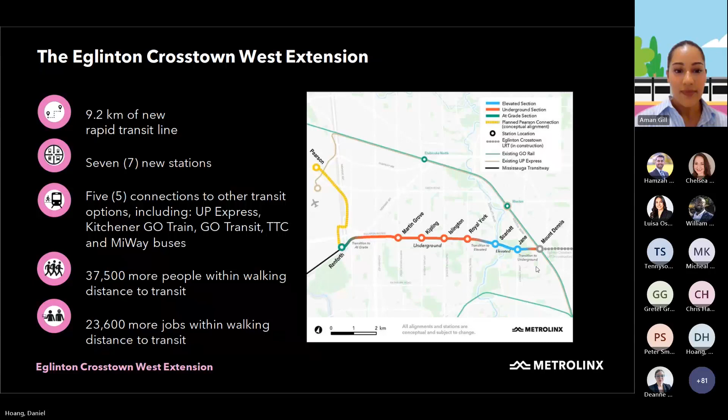I'll hand it over here to Micheal, who will take us through the construction timeline.

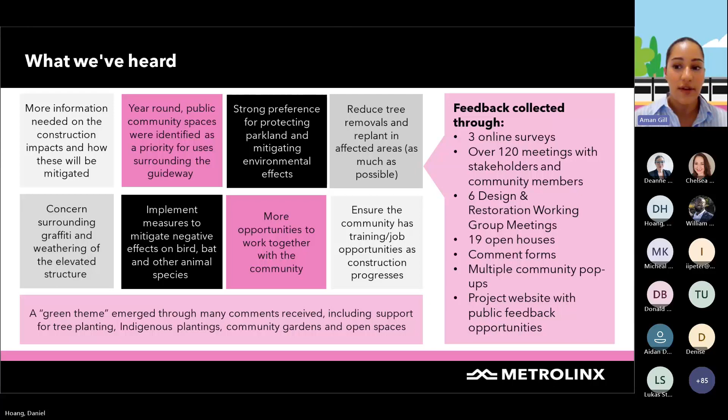Metrolinx is committed to minimizing project impacts through design, construction, and operation by integrating ways to reduce or mitigate the impact on the environment through design, ensuring Metrolinx contractors adhere to specific requirements and expectations to mitigate construction impact during the construction phase, and ensuring that regular maintenance and monitoring takes place during operation.

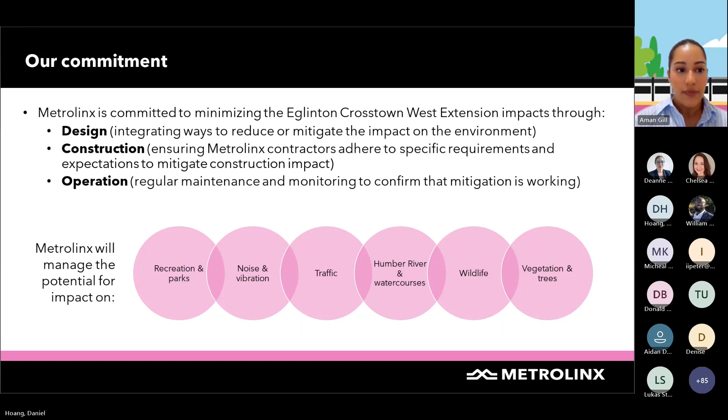We'd also like to share some best practices, including effective hoarding and signage placement to facilitate detours, thoughtful site plans to ensure business continuity, responding to neighborhood concerns to resolve reasonable complaints in a timely manner, traffic analysis and modeling to assess impacts and mitigations for all projects in the area, identifying and communicating public or private parking impacts well in advance, and surveying businesses so programs can be tailored to meet their needs.

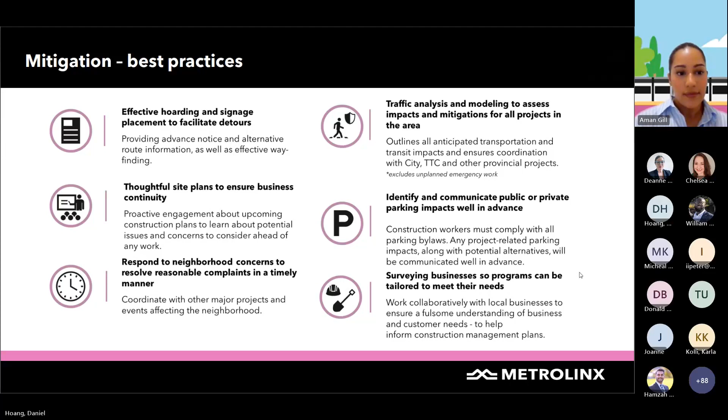Community safety is our priority. Some of the ways we achieve this is through our overall requirements, but also site-specific requirements. I'll read through some of them. Our overall requirements include contractors adhering to all provincial safety legislation and city bylaws, detailed construction and traffic management plans, along with safety plans that have been shared with Metrolinx and the city for review and sign-off.

The contractor will have to develop and implement noise and vibration plans in compliance with provincial standards. We've got flag persons and paid duty officers directing traffic where needed, and all construction impacts are shared with the community in advance via construction liaison committee meetings, community notices, neighborhood canvassing, etc.

Site-specific requirements include safe pedestrian access to be maintained, with any temporary sidewalk closures or detours having safety barriers, clear detour signage, and wayfinding so you can still get to where you need to go safely. During advanced utility work phases, fencing will be installed to ensure safety around the work zone. During the station construction phase, construction hoarding will be installed.

It will be visually appealing and well lit. The designs and imagery will be tailored to reflect the local community, and it will include wayfinding and safety information, again, so you can get to where you need to go safely, and access for emergency services will be maintained.

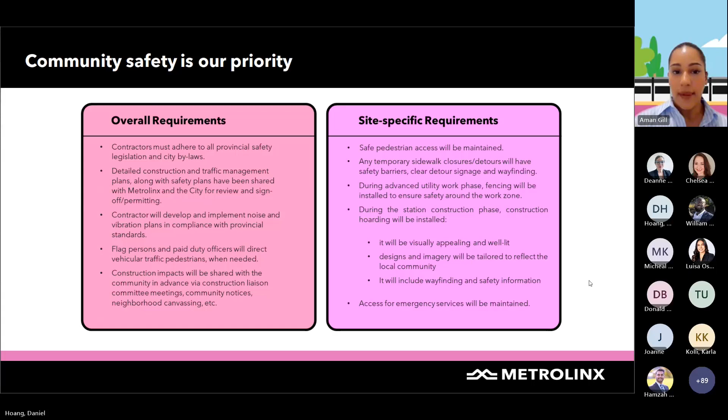This slide talks about the impact on parks, and just to emphasize that we know parks are quite important. All of these parks will be able to be accessed at all times during construction. That is a contractual requirement, so it's important to note that.

Some examples of this are the Fergy Brown Park Access Road. It is a contract requirement that a new Fergy Brown Park is constructed before the old Fergy Brown Park Access Road is decommissioned. Another example is the commitment to constructing a cycle track along the south side of Eglinton between Jane and Black Creek. So just to emphasize the importance of these parks and that access will be maintained at all times. Next slide, please.

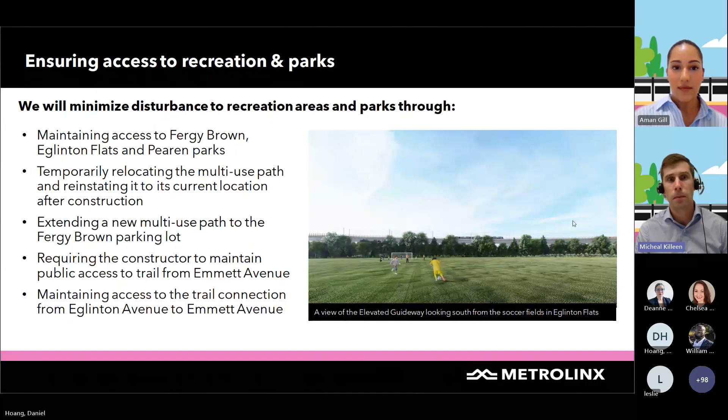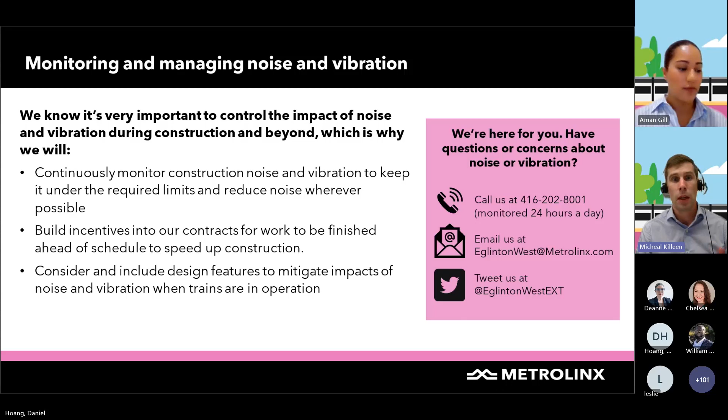And the other aspect to consider is the noise and vibration associated with construction. It's very important that when the contractors are working on this, excessive noise and vibration is not generated. To prevent this, we have set contractual limits, and Metrolinx have also set up a helpline for anybody that wants to raise concerns. In addition, we've also carried out an acoustic study and hope to share the results with you so you can hear for yourself and judge what it will sound like in operation. The results will be able to inform additional mitigation such as rail dampeners or noise walls in future.

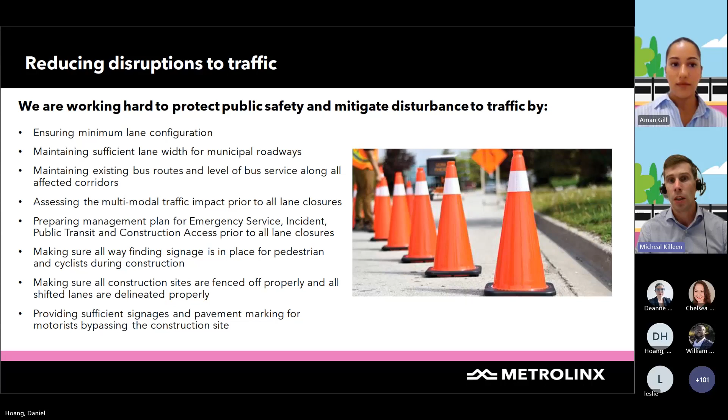This slide talks about minimizing disruption to traffic and to users. This is a very important consideration for Metrolinx in terms of their projects. By and large, works along the ECWE will be off Eglinton Avenue, trying to minimize disruption to users. In the event that works do have to come onto Eglinton Avenue, for example if you're doing utility works or an approach ramp near Scarlett Road, you may have to work in the roadway. In this case, the contractor will be required to submit a traffic control plan to the city for review and approval. This plan will contain information such as how many lanes will be taken up, how long the works would be, and safe access points. Safety is at the forefront here, and all of these plans are developed in close collaboration with the City of Toronto.

I'm going to go through how we're going to mitigate impacts to natural features. First, I'm going to speak to the Humber River. There are a number of measures that will be implemented to protect the Humber River and other surface water drainage features and wetlands.

The first thing is really at the design stage. We're not going to be in the river channel itself. The bridge is going to span the river, so there's not going to be any direct impacts in channel. We install construction fencing around the perimeter of the construction site to prevent the encroachment of construction vehicles and workers into the adjacent natural features. As a design criteria, we retain and protect as much of the natural vegetation as possible.

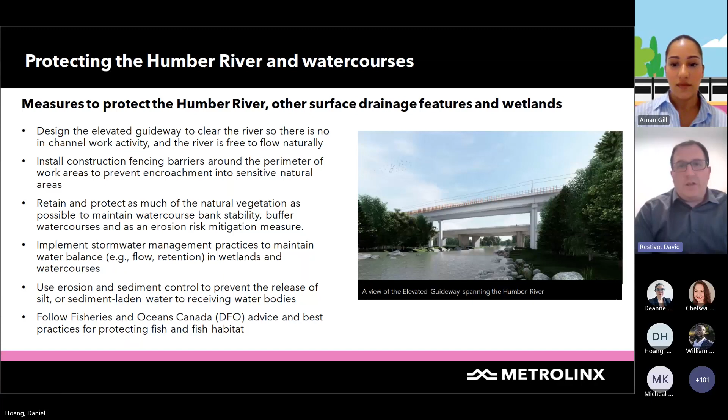This has many functions—it provides stability, reduces the risk of erosion, and acts as a buffer to these water features. We'll implement stormwater management practices to maintain post-construction flow and water retention to surface water features and wetlands, matching what is happening prior to construction. Erosion and sediment control plans will also be implemented, preventing the release of sedimentation to receiving water bodies. We consulted with the Department of Fisheries and Oceans, or DFO, and they provided a letter of advice, which includes a number of things to protect and avoid effects to fish and fish habitat, including best management practices, conducting work in the dry, monitoring programs for sedimentation, and the need to prepare a spill response plan.

Protecting wildlife is also a priority. This includes implementing timing restrictions if you're going to be disturbing natural features or wildlife habitat, such as a bird nesting window and vegetation removal restrictions. For example, between April 1st and August 31st, there won't be any tree removal within that habitat. We also install things like bat habitat structures, in accordance with an Endangered Species Act permit, to supplement habitat that might be removed in the woodland feature, acting as a mitigation measure.

We fence the work area, as I said before, and that's not only to prevent encroachment out, but also to prevent wildlife from coming into the construction zone. In the event that does happen, we have qualified biologists or personnel with the qualification to handle wildlife and move them out. First and foremost, we allow wildlife to egress the construction site on their own, but if they're injured or not leaving the site, these individuals are qualified to handle them and move them to an appropriate habitat.

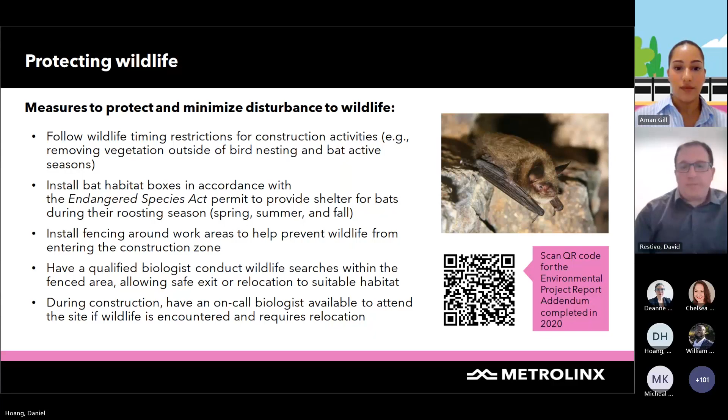So, ways in which we manage vegetation and tree impacts: first and foremost, we follow the Metrolinx vegetation guide, which identifies the data needed for arborist reports. It identifies the number of tree and vegetation plantings needed to offset any removals in natural features or landscape areas affected by construction. It also recommends healthy soil specs, seed mixes, and plant selection.

Other things we do include consulting with municipalities and local conservation authorities and abiding by environmental regulations and bylaws. We provide additional compensation for designated natural features—it's not a one-to-one, we're providing a greater number of vegetation and trees to go back onto the landscape. And we also ensure we site our work outside of sensitive wetland features.

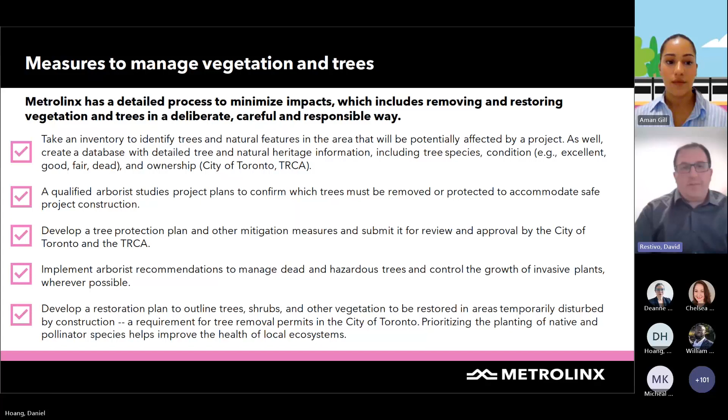Next slide. So we do have compensation formulas that we use. For example, in designated natural areas, we use the TRCA's protocol, and for every 1 hectare of woodland that we would be removing, we would have to replace potentially 3 hectares of replacement vegetation.

And similarly, the City of Toronto has tree bylaws. So if in areas regulated by the city, for example a private area, we would replace all private trees removed over 30 centimeters diameter at a 3-to-1 ratio, all park trees and all street trees at a 3-to-1 ratio, and ravine and natural feature protection areas would be another area-based compensation approach.

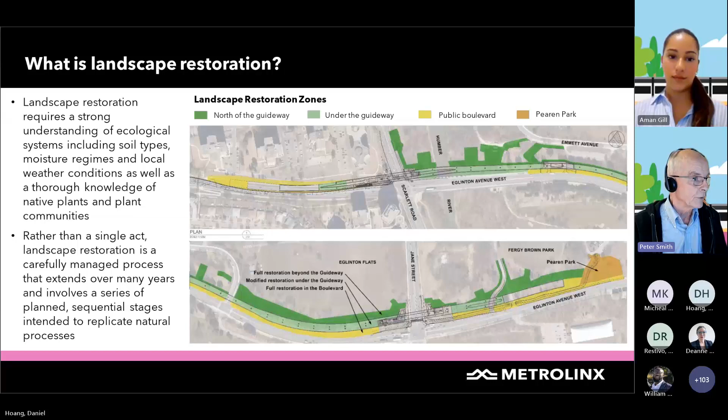Next slide. So what are the 4 major components of successful landscape restoration? Number one, very important, is healthy soil.

Metrolinx is developing criteria and strategies for either repairing existing soil on site or importing new soil, and developing very high standards for all of these activities. In all likelihood, the soil that will be brought in or prepared on site will be far better than what's out there now.

We all know that Eglinton Avenue West was actually constructed in 1970 on a landfill causeway with a lot of fill and probably at the time not very good topsoil. So the soil, when we leave the site, will be even better than what's there now.

We use native plants. Why do we use native plants? Because they are hardy, they are self-sustaining, and they attract or set the context for wildlife habitat, which is superior to other kinds of vegetation.

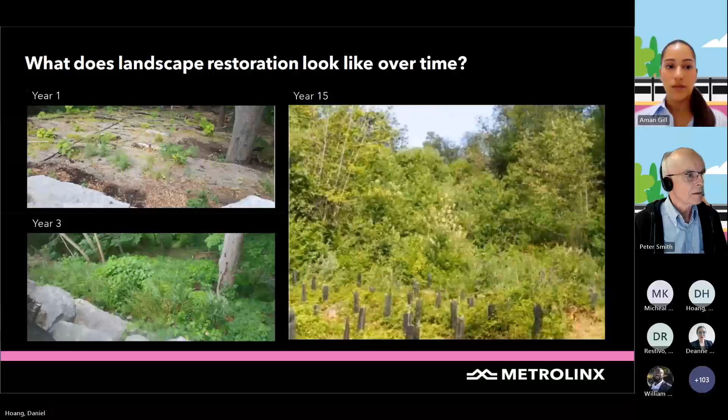Metrolinx is undertaking a landscape restoration plan that's underway right now, scheduled to be complete sometime next June. What is the plan and the purpose? It's to set the direction for detailed landscape design along the alignment, covering all aspects of the ECWE, including Eglinton Flats, the areas associated with the elevated guideway, the city boulevards, and all the lands surrounding the ancillary buildings and stations. So it's a very big project.

One of the purposes is to ensure a consistent line-wide approach so that there is an identity to the ECWE project. Certainly, one purpose is to engage directly with the community, with community stakeholders, and to engage with city and TRCA stakeholders in order that we understand their requirements and they understand our issues and challenges.

When the restoration plan is complete, it will have been approved and vetted by the key stakeholders. That provides a certain design certainty so that we know what's going to come out of this process, and the community knows what's going to come out of this process as well. We'll all understand the process and have expectations that are realistic and implementable.

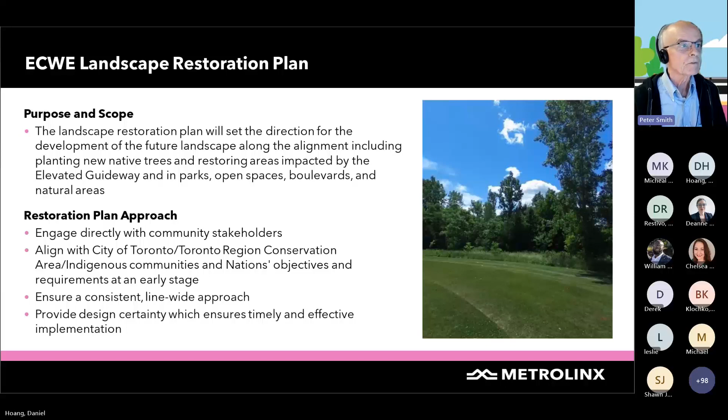That's just a couple of views of the elevated guideway and the kinds of restoration that would be associated with it. North of the guideway, any lands impacted by construction will be restored and will become even better than what's out there now, eventually.

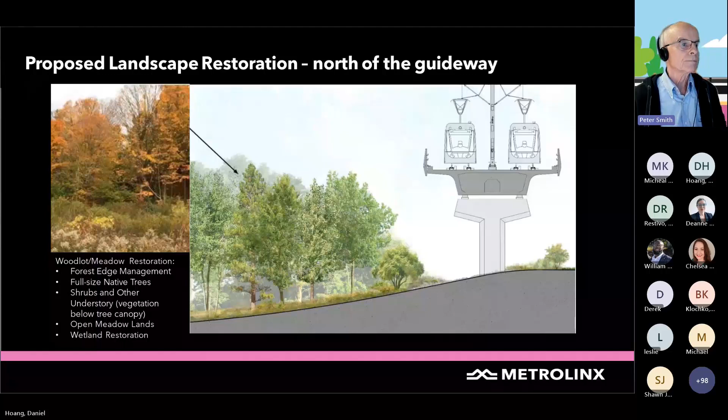The lands directly underneath the elevated guideway are challenging, without doubt. There is reduced sunlight and reduced rainfall in these landscapes, which means they're going to be quite unique as well as challenging. There are plants that will survive under these conditions, and we will optimize their use.

There may also be areas where vegetation cannot be supported, and those areas will be developed with beach stone laid out in what we call a dry creek pattern, fully integrated with the vegetation on either side. This is still under development—we're still working with this—but the intention is to develop landscapes that are cohesive, integrated, and fully recognizable as designed landscapes.

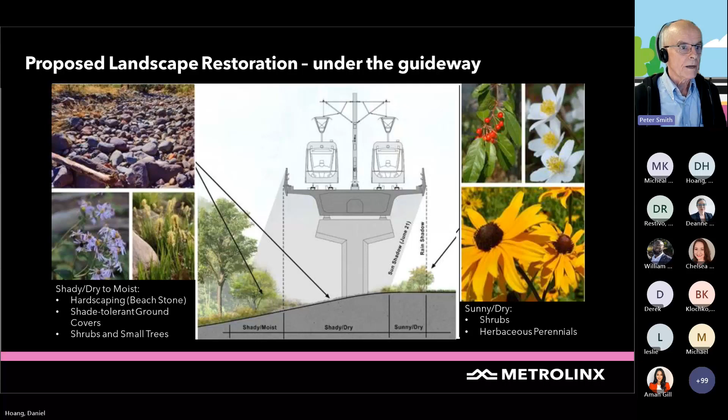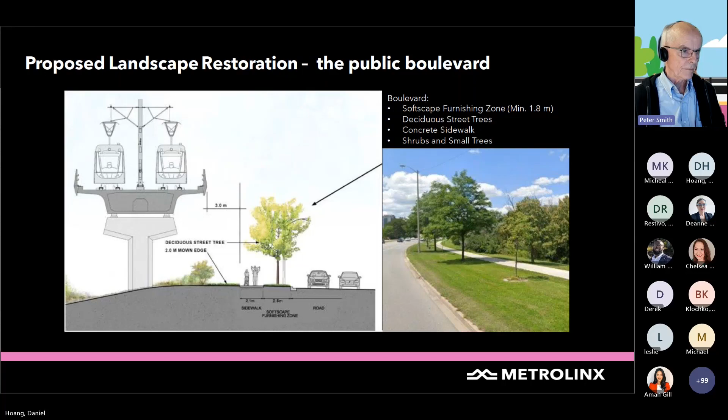Not only to help create a pedestrian environment which is comfortable and at a pedestrian scale, but also to mitigate views of the elevated guideway from the street.

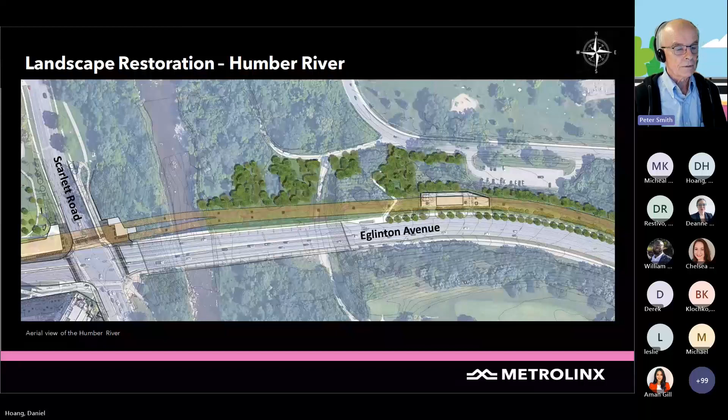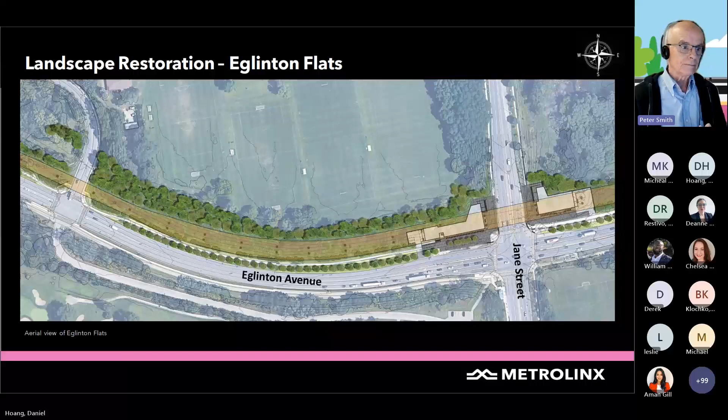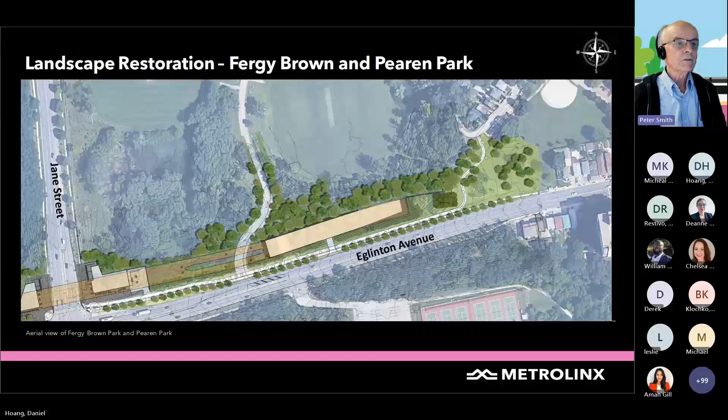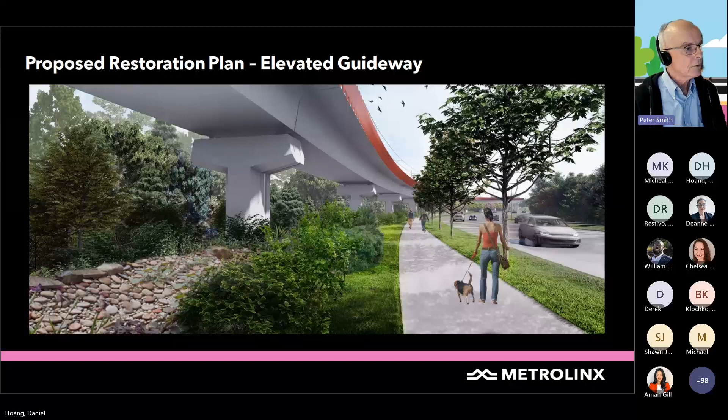So we're optimistic. We're looking forward to continuing to develop the restoration plan and looking forward to sharing it with the community at some point in the very near future. Thank you, and I believe it's back to Micheál.

Thank you very much, Peter. So following on from the work that Peter and our team are doing on the restoration plan, we're also developing some tools to help you visualize and hear what the guideway sounds like. Although we don't have the acoustic part of this ready for today, that'll be a future open house, we did want to share some of these tools with you. Next slide, please.

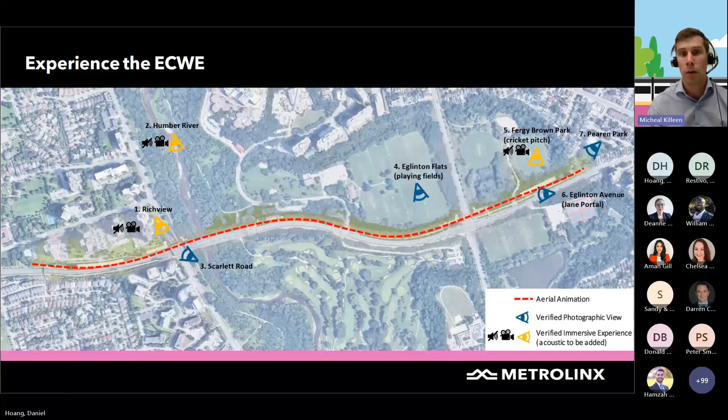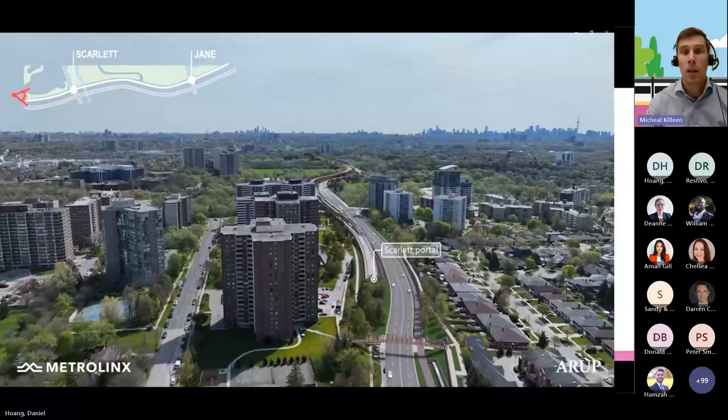Thank you, Daniel. So this is the aerial animation. We're starting here on Scarlett Road and we're going to travel from west all the way to east. See here, this is Scarlett Portal, where the underground tunnels enter, first contact daylight, and the alignment starts to rise from the ground. It takes over a bit of Eglinton, and you see Eglinton is diverted here.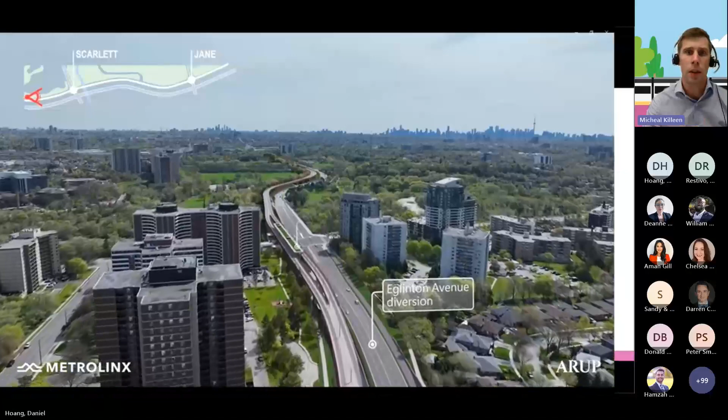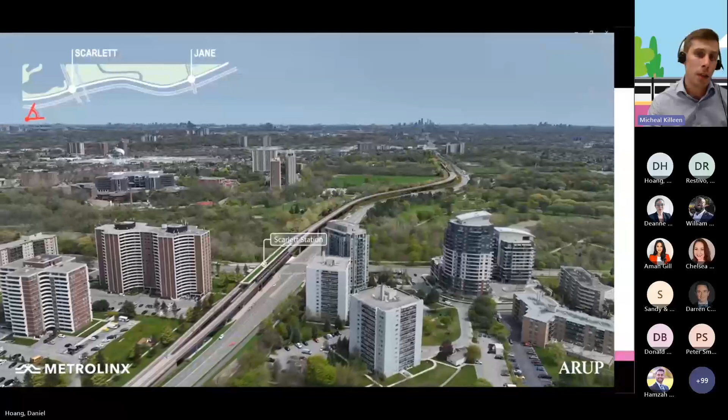What we see now in the picture is Scarlett Station, and if you look closely, you'll see a green roof. This helps reduce environmental pollutants, and it also helps us to lower energy costs. This is another view just at Scarlett Station. We can see that green roof there again.

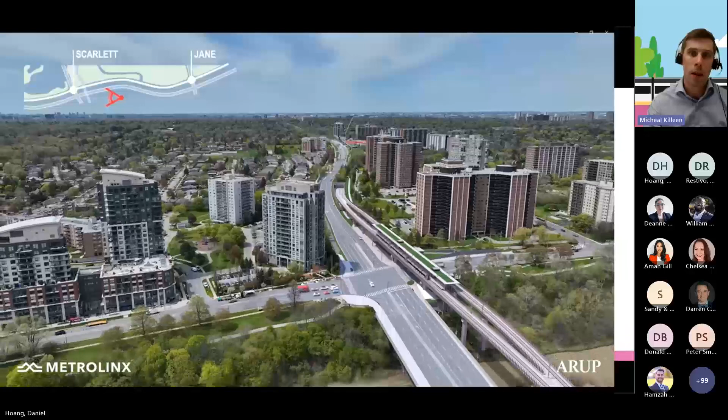Looking back, this view will now show us what the Humber River looks like. In order to minimize the impact on the river and aquatic life, there's a minimum of a 7.3 meter setback for the piers, so no piers in the river.

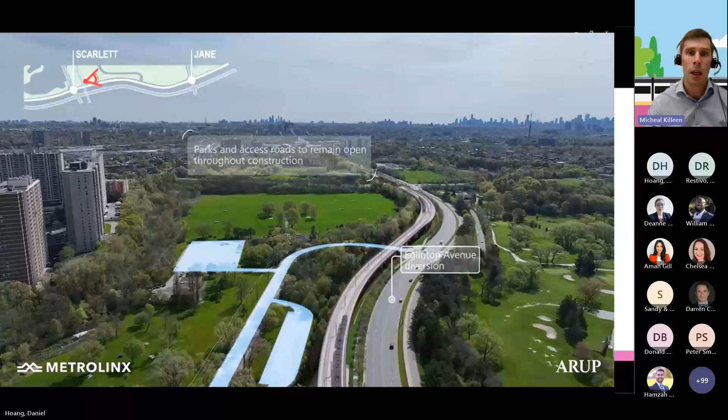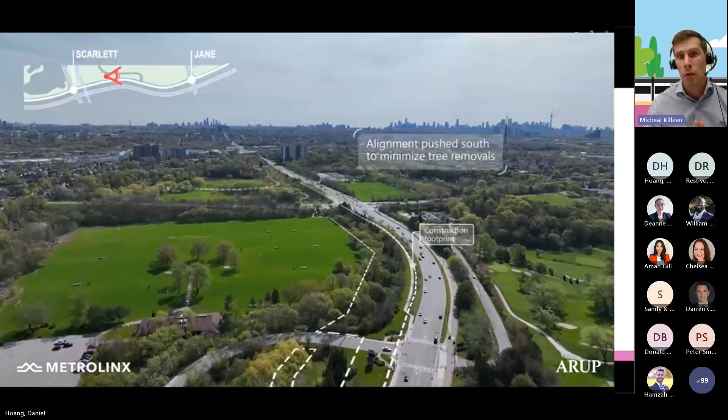This image here shows us the playing pitches, and these are the parking lots. We know this is a very important amenity, and access is maintained at all times. The dashed line here is basically showing the extent of construction. We've pushed it as far south as possible in order to minimize the tree removals, and also introduce incentives into the contract so that the contractors, when they're working, will be incentivized and compensated for saving more trees.

As you move here now along Jane Street, very shortly you'll see where our cycle track starts.

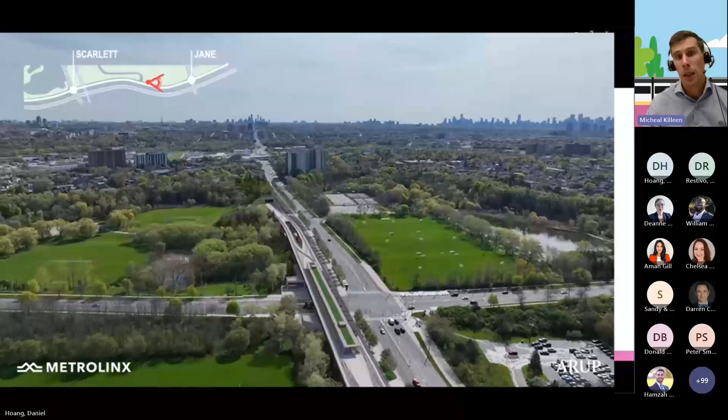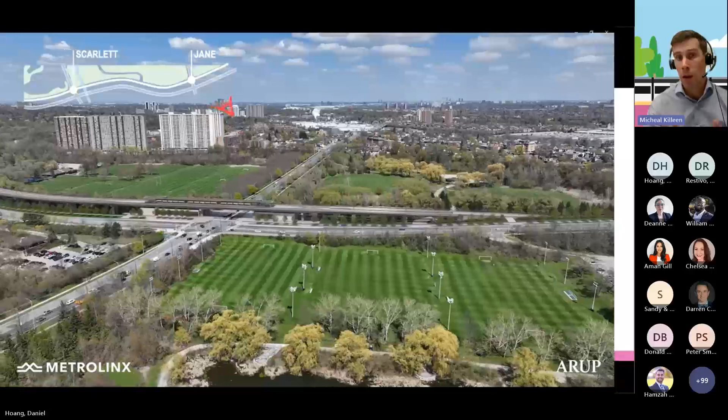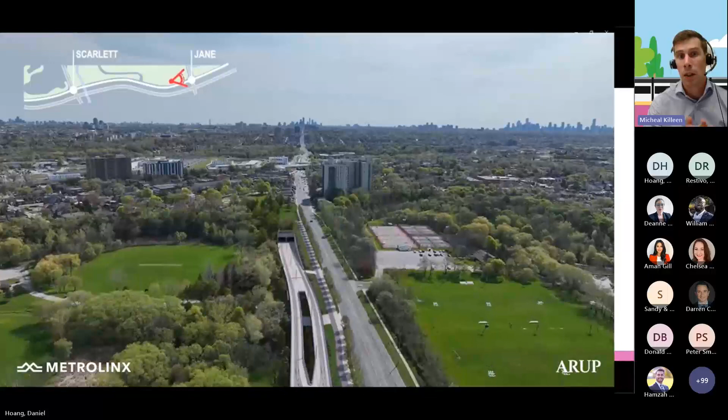The cycle track basically starts at Jane Street and goes all the way to Black Creek Drive. The purpose is that the MUP, which goes to Pearen Park at the moment, will be disconnected during construction, so we have to put an alternative cycling route in place. We believe this offers better connectivity for cyclists. You'll also note highlighted here this new upgraded Fergy Brown Park access road.

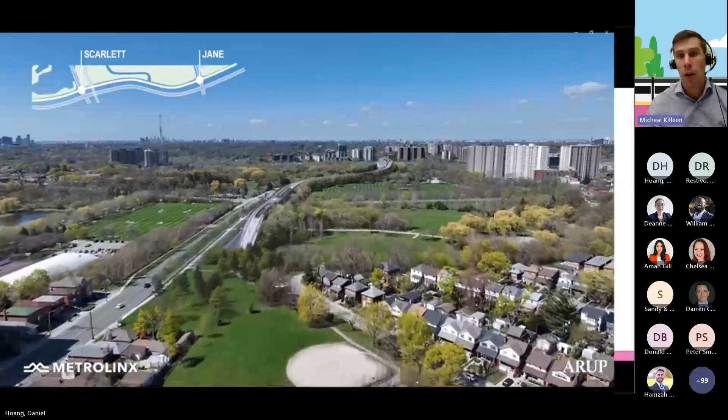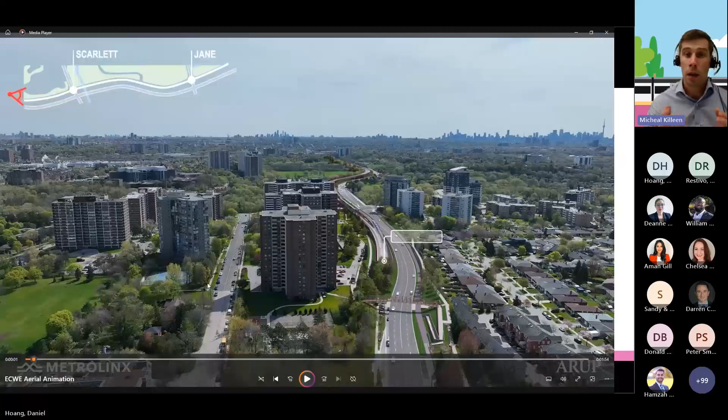As mentioned earlier, this is to be constructed first before the existing road can be decommissioned. Finally, we have a view looking back here on Pearen Park and looking west. So that's our aerial animation just to show some key features of this project. Thanks, Daniel. The next thing we're going to speak about is these time montage photographs, basically the restoration over time.

So how do we predict what the trees and vegetation will look like? We've consulted with our arborists and landscape architects, and we've looked at what tree species grow and the rate of that growth. This allowed us to predict what the trees are like after 5 years and also after 30 years. We then take this information and update our baseline information that we see in the field. Let's look at some examples.

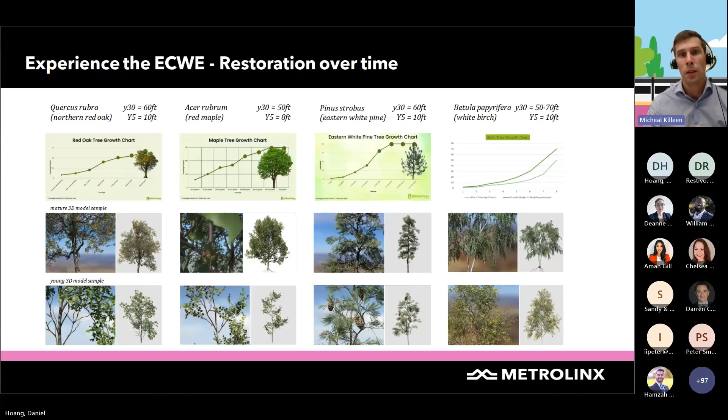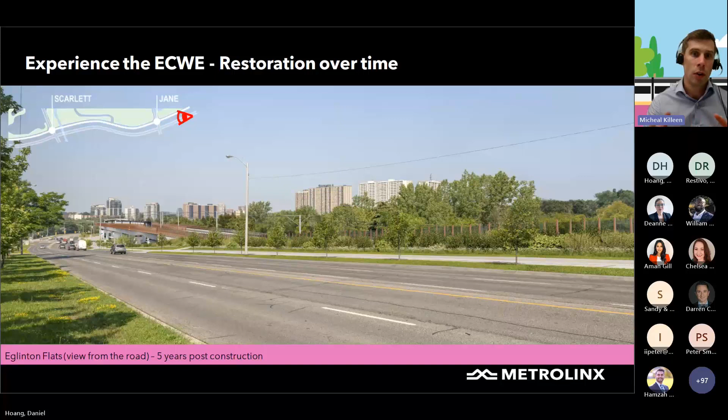The first one is taken just across from Pearen Park. We're standing on Eglinton looking west, and this is basically the existing MUP, taken in July this year. The next slide shows what it looks like after 5 years—we can see the vegetation is starting to take hold. These street trees aren't fully grown, but they're starting to screen the portal. After 30 years, this vegetation is fully mature and serving its function to screen this portal. It's actually very difficult to see Jane Station from this view.

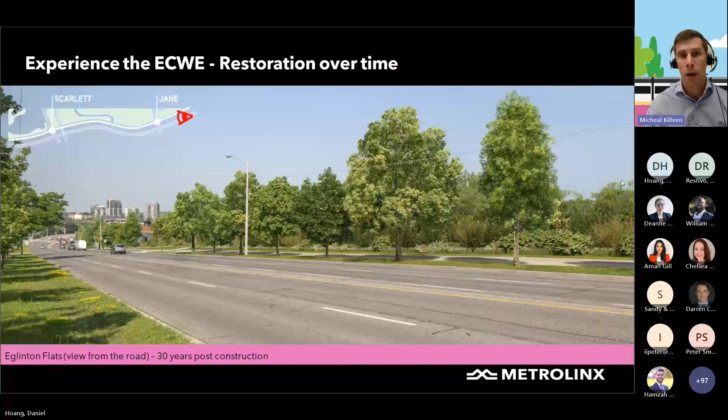Another location is Pearen Park itself, taken at the moment close to the baseball diamond. During construction, we have to occupy part of this area, and some of these trees will be removed. But long term, we will be restoring this park, and after 30 years, these trees grow back. As Peter mentioned, we would love to hear feedback on enhancements or changes we can adopt for the restoration in this park. The plan is that ultimately, long term, you will not be able to see the portal or the project from here—it will be restored to its original condition.

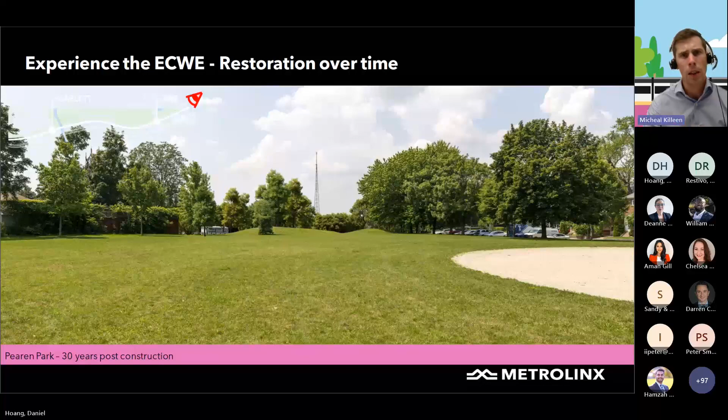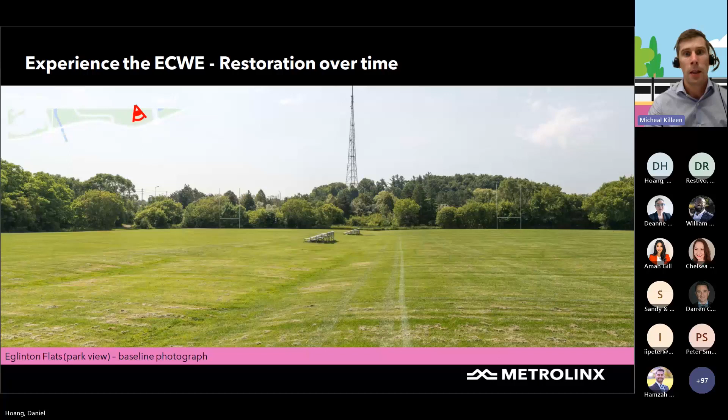Next location is Eglinton Flats playing pitches. This is the radio antenna looking due south. The next slide shows what it's like when Jane Station comes here with an LRV travelling. After 5 years, the vegetation is still growing back. But after 30 years, we can see that the superstructure itself—the deck and the piers—should be camouflaged and covered by these trees. What's visible is the upper platform of the station and the LRVs travelling.

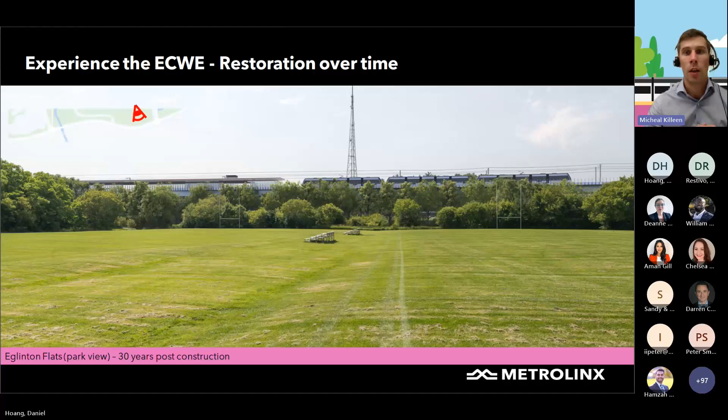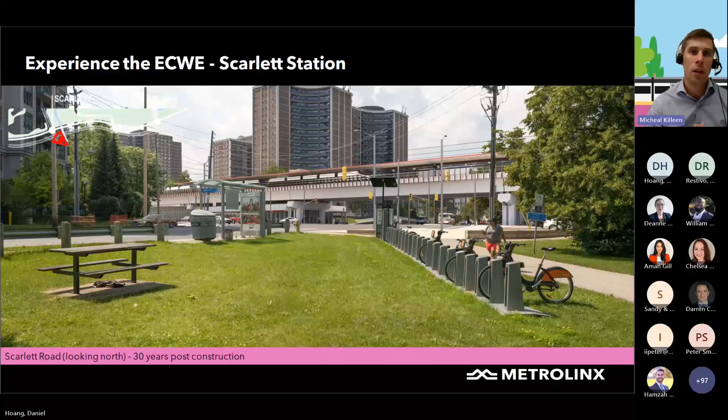There's one last location, at Scarlett Road. We're standing just south of Scarlett Road beside the bike dock on the Humber Trail. This is current construction—you can see some of the hoarding fencing associated with the works at the moment. In 30 years' time, the next image helps visualize what the station looks like here. The station will span across Scarlett Road, and if you look closely, the main entrance to the station is located just west of Scarlett Road and on the north side of Eglinton Avenue. These are our time montages showing what the restoration looks like over time.

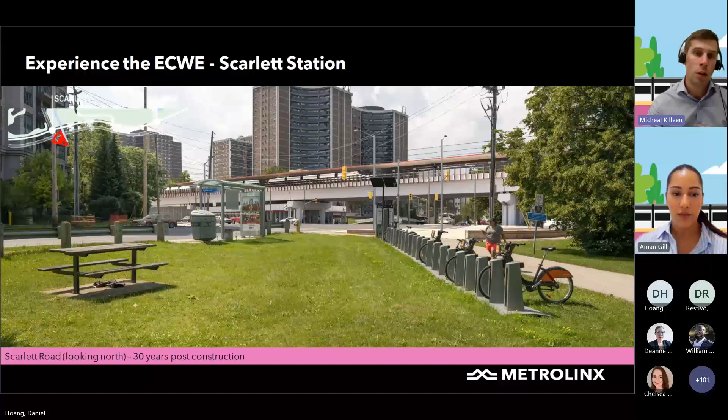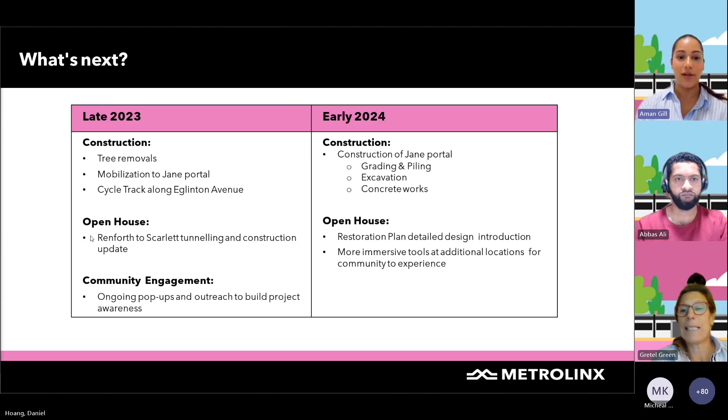Thanks. And while I've got you, I've got a question here about tree compensation: how will trees be compensated for?

I think we had a slide to that earlier. There's many different ways that trees are compensated for. We have a vegetation guideline that we created to be transparent and to outline how we do that. In areas that are designated natural areas, we have what's called ecological compensation, and that ecological compensation, as was shown for basal area, which is most of this project, is actually done by the area of the planting, the densities. I think they're going back to that slide.

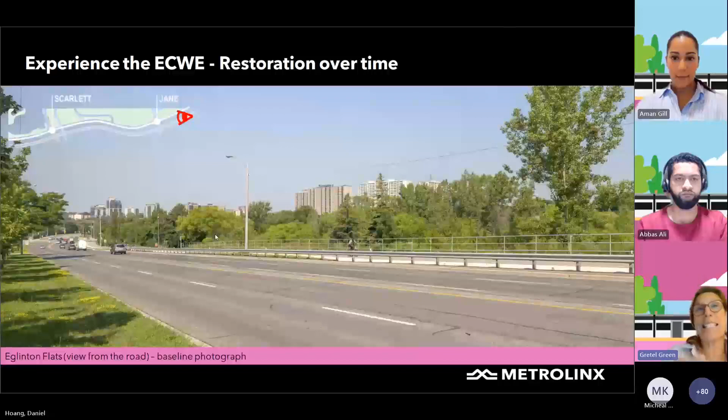So I hope that answers it. Micheal, add something if you want. I think it was Micheal whose slide this was. Or did I do a great job? You did a fantastic job, Gretel, but maybe I can just add a little bit more there.

Most of the project is based on basal area compensation. In doing that, we really evaluate things not just based on whether it's natural or not. We actually go into the forest and do studies to see how dense the woodlot is, and we provide appropriate compensation based on those in-depth studies.

Getting the density of the woody vegetation, we do prism sweeps, and that dictates the ratio of compensation that comes out of that. So for a woodland it could be 3 to 1, but if it's a really dense woodland with a lot of woody vegetation, it could be as high as 8 to 1.